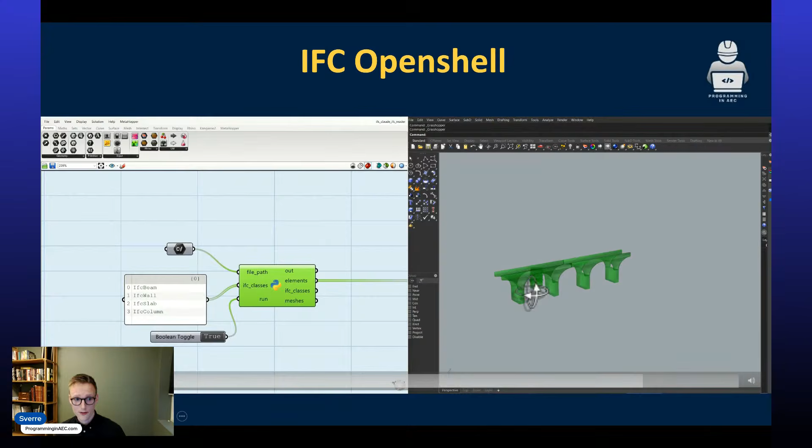So here, I just close it and run it. This is a very small IFC model, so of course it's very fast. It's one of the free demo models that you can find from IFC OpenShell. But it just shows that this is a really simple way of getting started with tailoring your needs to your software using Python.

Another thing that Python excels at is data analysis and reporting. Say you have some data in a tabular format and you want to create some nice reports and plots from it. Python can do that really easily. Again, I will show you in what's called a notebook.

You can do that online, check out Google Colab, Jupyter notebooks, whatever. You don't need to install anything on your computer. Upload your CSV file or Excel file, and in a couple of lines of code, you go from tabular data to beautiful plots. I'll show you a small example of that as well.

This is a notebook, which is also a great way of combining code with text for reporting and documentation. The text you see here is called Markdown, just a very simple code for writing text. You can also have what are called code cells. So I write some text in a Markdown cell, and then I have a code cell where I do a couple of lines of code, and I can just run that specific cell to see the output.

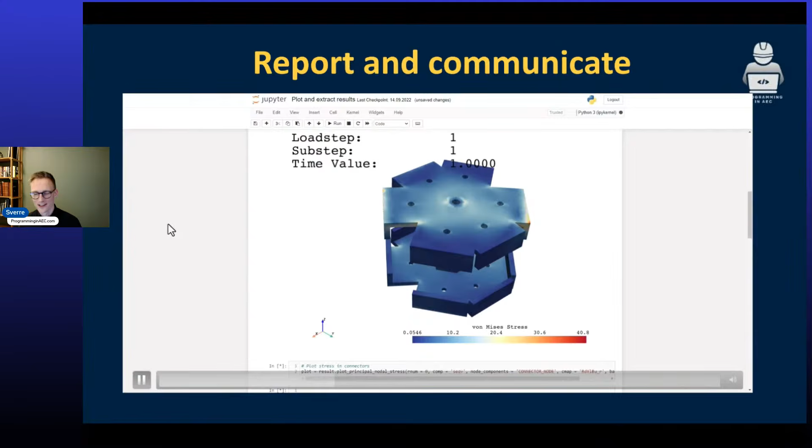Of course, you're not getting away from using AI at some point. This was created actually before we got all of these LLM models, so I probably use like 15% of the time I did once I wrote this. But...

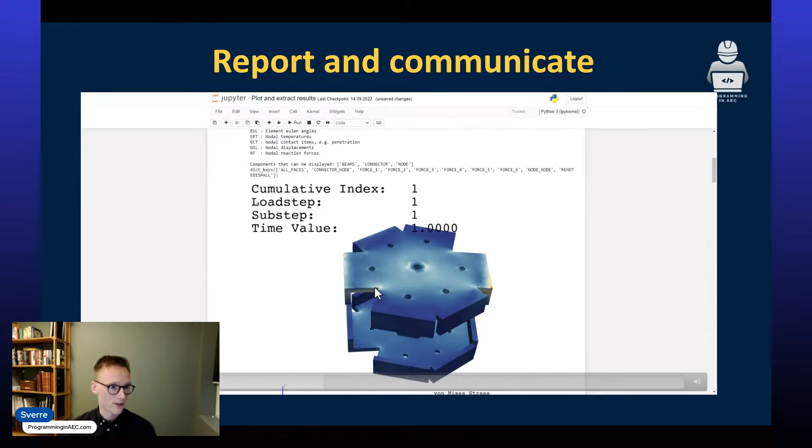Of course, you can integrate these with machine learning. Most professional software now has some AI agent integrated into the tool, so you can just click a button and ask it to write the code for you. It will help you import the data, format it, etc. And if you're working on your computer, you can use whatever agent you have to work on your code, because this is just kind of JSON based, so you can actually work on that behind the scenes, creating these cells and Markdown for you.

So integrating this with AI is extremely simple, I would say. There are so many ways to do it, from just typing in the chat and copy pasting the answers to actually having agents working directly in the file for you. But you should always know the basics, of course.

And then another thing that you will encounter once you start getting good at programming is that, of course, not everyone else at the office is good at programming. Even though you make amazing scripts with amazing results, if you present it to them as code, they will not trust it, because they don't know how to read it, they don't know how to interpret it, and they probably even don't know how to run it or change variables. So how do you go from your source code to something that makes sense and can be shared with others that doesn't know programming at all?

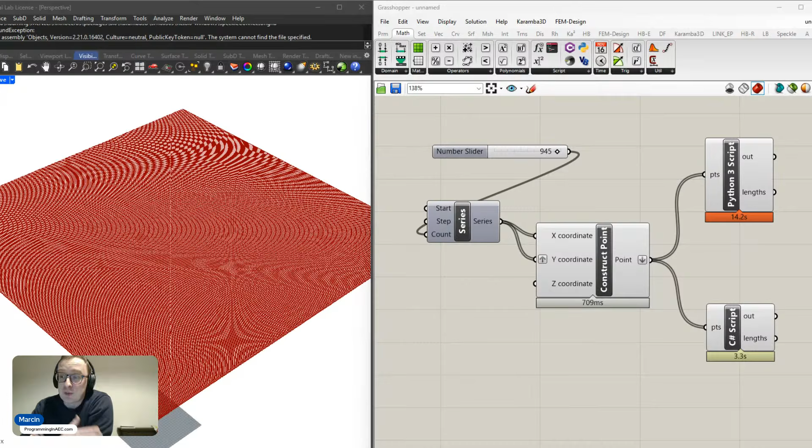When I was watching what Sverre was presenting, I was thinking it's a pity because he focused so much on Python, and I focus in my presentation a lot on comparing those two. So I am very sorry, but I will not focus only on C#, but the comparison of those two. So maybe it's not fully even, but it is how it is.

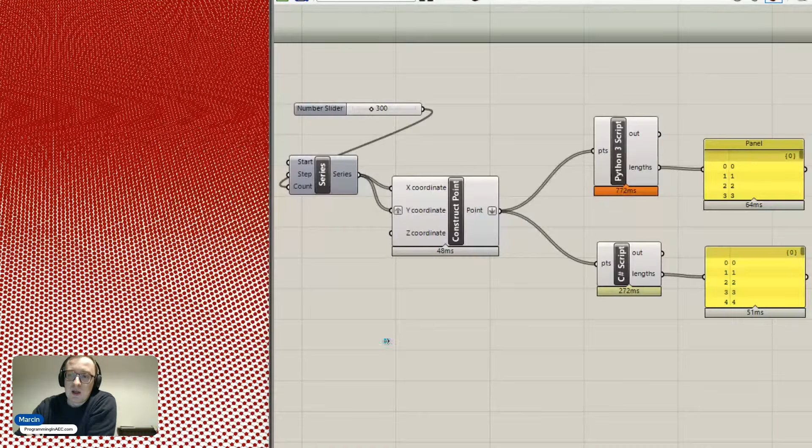If it is written in a specific language, then using this language will always be faster because you don't have to compile the code. In Python, you always have overhead. So even if you are using RhinoCommon from import Rhino as RG, it means you have to read it, create it in C#, save it, and calculate it. So that's why you see quite a significant difference in the time.

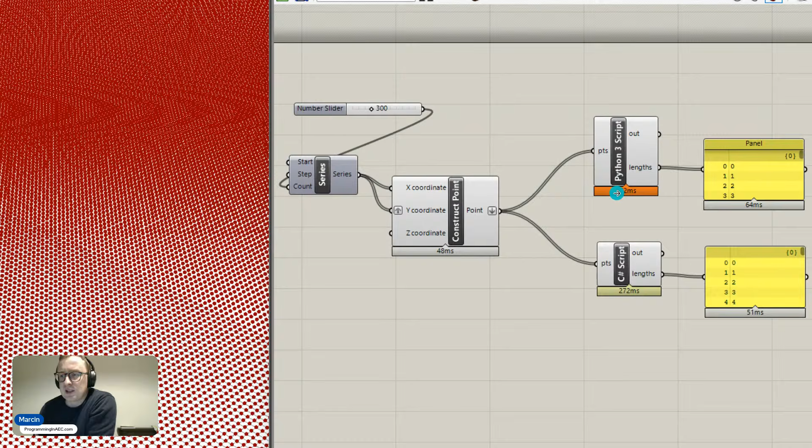This time is the time of presenting in the canvas, so if you're not super familiar with Grasshopper, generally this is the time for the algorithm to run, reading the input and writing the output. So it's not really showing the whole difference between C# and Python. If you have a geometry and want to operate on it, which is heavier than calculating distance, then probably we'll have an even bigger difference in operations on the geometry.

Right now I created a simple script. This script generally creates spheres with a specific radius. It's not that significant, but significant is that we are creating a BREP, boundary representation, so a sphere, quite sophisticated geometry. You have to preview it in Rhino, and generally the code works in a similar way. We have a grid of points, and here to compare the time, I used a stopwatch to calculate in milliseconds only the operation done in C#, without creating the input and output.

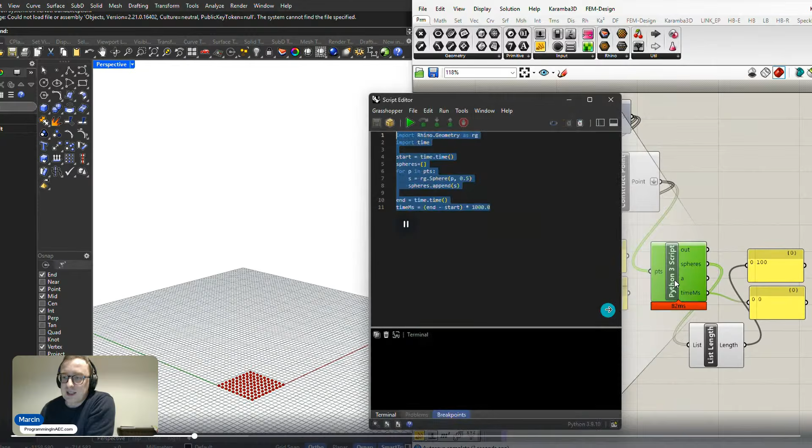So we see that for 10 elements, we have 0.018 milliseconds. In Python, I used something like a start time and end time, and I calculated the time in between. You see that even for smaller numbers of operations, like when we're doing only a few loops, here creating 10 by 10, so 100 elements, the time for Python was longer.

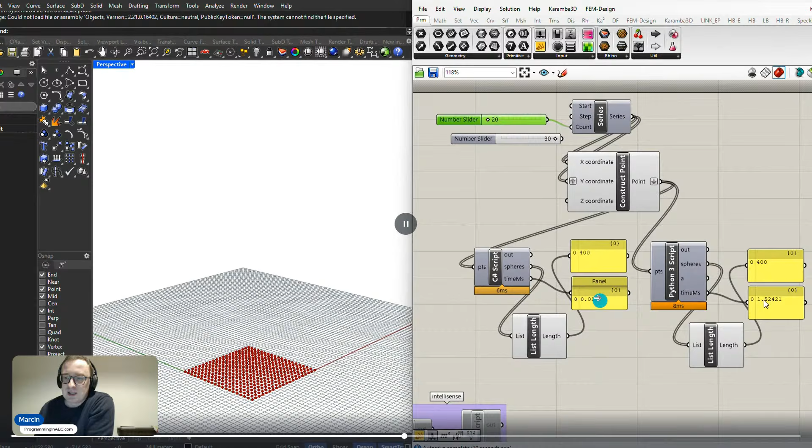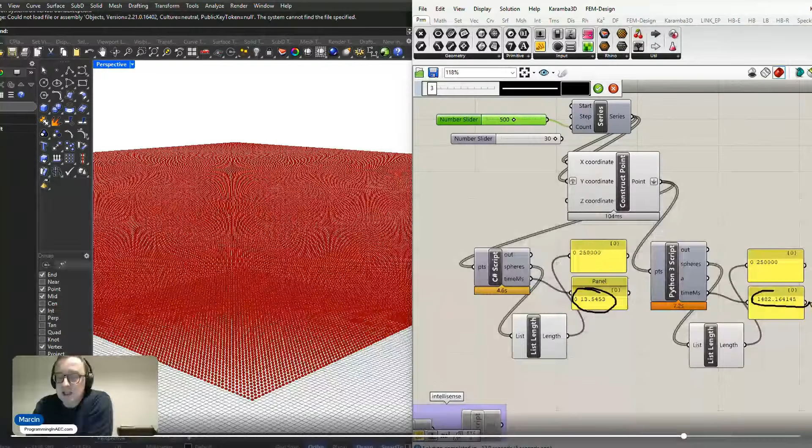But then when you increase the number of elements significantly, you see that C# demands still quite a small amount of time, while Python starts to grow - it's not just growing, it's exponential, I'd say. With 1000 by 1000 points, this change is really drastically growing. I think the final test was 500 by 500, so around 250,000 points. And you see that in milliseconds, C# was creating this whole bunch of spheres in 13 milliseconds, and Python took 1,400 milliseconds.

So the change in time for computing and creating geometry with Python versus C# with those kinds of components in Rhino and Grasshopper is quite significant. You can save a lot of time and computational power. So this is one thing, the performance.

The other thing is clarity, in creating methods and creating loops. Generally, I tried to mark how it is to create a loop in Python, how it is to create a method in C#, and exactly the same loop. A lot of people say that in Python, since you don't need to use those curly brackets, the code is cleaner. I can agree it's maybe shorter, but definitely not cleaner, in the sense that using curly brackets for longer code can really save time when reading it.

Also, one very important thing is the difference between strong typing versus dynamic typing. Why is this important? Generally in Python, it's famous because if you're creating a list or a dictionary - here I'm creating a dictionary - you can use whatever types of elements you want. In C#, you always have to specify if it's integers or doubles, and a lot of people who are beginners and not familiar with it say this is a pain and a problem when learning the language.

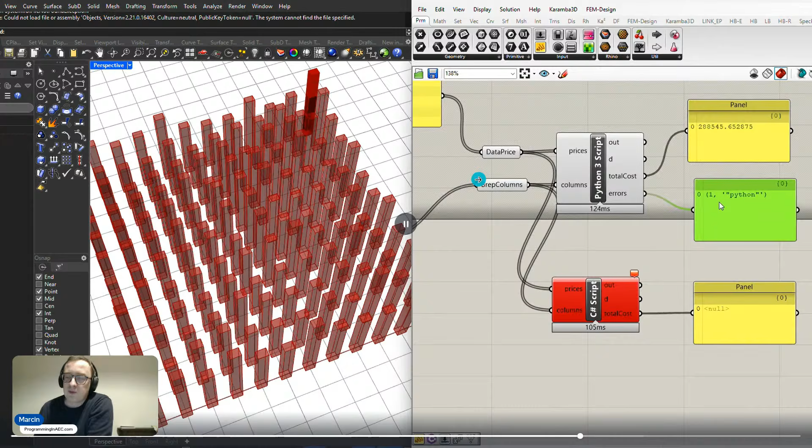But think about it from a different perspective. If you are specifying it at the beginning, it's already some kind of comment to the people who will be using this code or want to modify it. Also, it's not forgiving errors. For example, if I have a list of objects with a price, and I change one of the prices, which should be a number, to text, then Python will still work and proceed. The C# code will not proceed.

And you can say, well, this is because C# is not flexible enough.

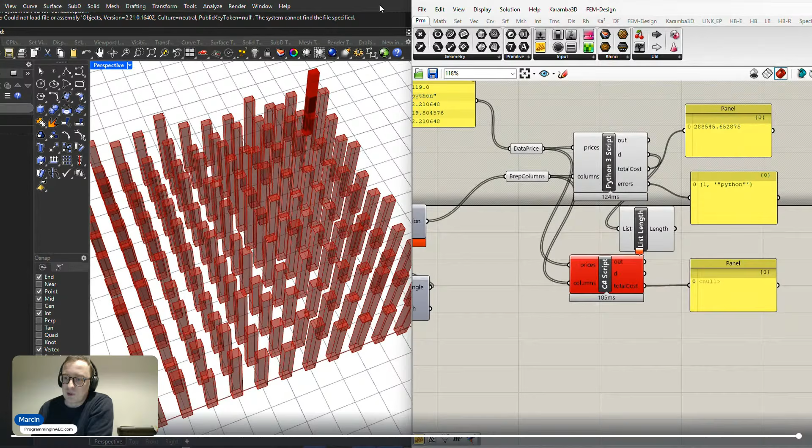And I am saying, no, it's because it's the C#. You have to really be careful about what you are doing. If you're creating an error, it will not go to the next stage. So whenever you are thinking about strong and dynamic typing, think about the errors which you can create or

you cannot create in both languages. So a similar thing we can observe in the classes. If you're going into coding and thinking about programming, then the class is like the recipe to create some kind of object. So making them in a specific way with all of those strong typing that you have to say that it is a string, it is a double, it is a point, it is a line. It's always some kind of information.

In Python, even if you are creating that kind of code, especially if you think about code which has 200 lines, if you are not specifying what kind of data type it is, then you have to create a comment. Because if somebody else will be using this code, you will probably get a call from him every 20 seconds or even faster.

So when it comes to the comparison of Python classes and C# classes, when it comes to the safety of creating those classes, I think C# is definitely winning. When it comes to debugging, and I'm talking purely about Rhino and Grasshopper, C# is also winning because the whole Rhino and Grasshopper is generally written in C#. So you can use all those suggestions, which I will be talking about in a second. When it comes to performance, probably I already somehow convinced you that it's incomparable.

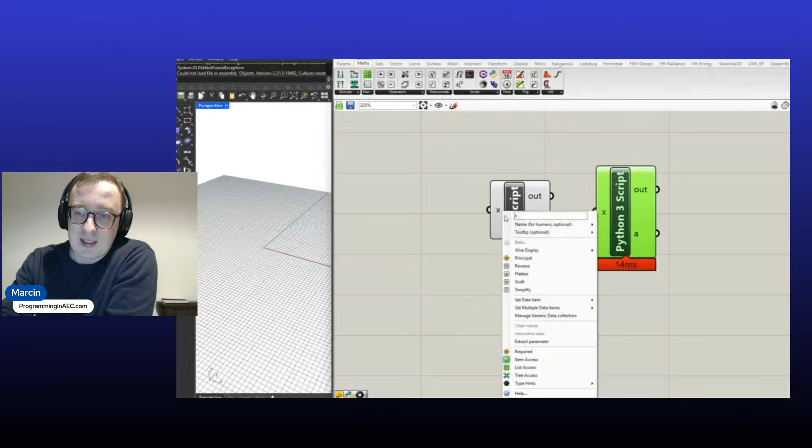Well, if you go into Python, the script editor in Grasshopper will not be so helpful. I will just go to the IntelliSense definition, so why it's helpful and why not, it's called IntelliSense. In the script editor, even if you set up that X is a curve in C# script, if you just type X dot, you will have all of the methods, which probably if you are at least basically familiar with Grasshopper, you can recognize, like divide by count, divide by length. So you can divide this curve easily.

If you go into Python, if you are putting a dot, well, that's a pretty sad view. You see generally almost nothing. It's really, on one side, maybe it's much faster coding with Python. On the other side, you are missing a lot of hints from the compiler and the script editor.

When it comes to scaling, well definitely, if you are here and you want to listen about programming, and we are strongly connected with the Rhino and Grasshopper environment, this is how the basic plugin looks like in Visual Studio, created as a standalone plugin, which you can share with other people. You generally see that all of those things are written in C#.

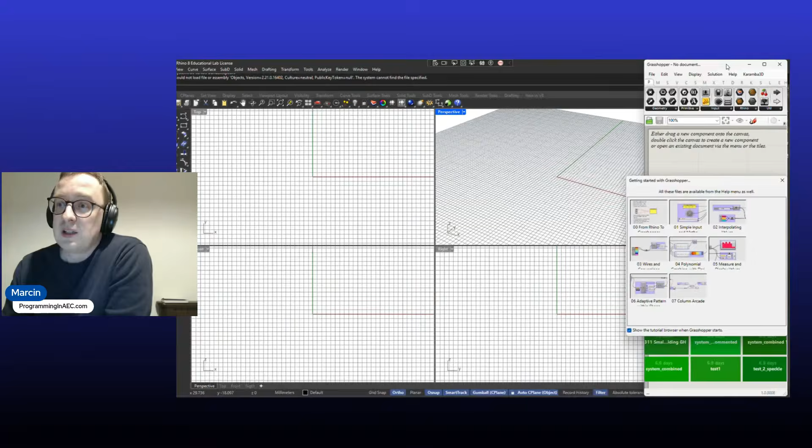Adding icons, creating inputs, outputs, everything is in C# because Rhino and Grasshopper is written in C#. So the plugin generally looks like this, but it's exactly the same when it comes to Karamba or anything else.

And that's exactly what scalability means. Scalability of C# is almost one-to-one when it comes to creating a plugin or even a software.